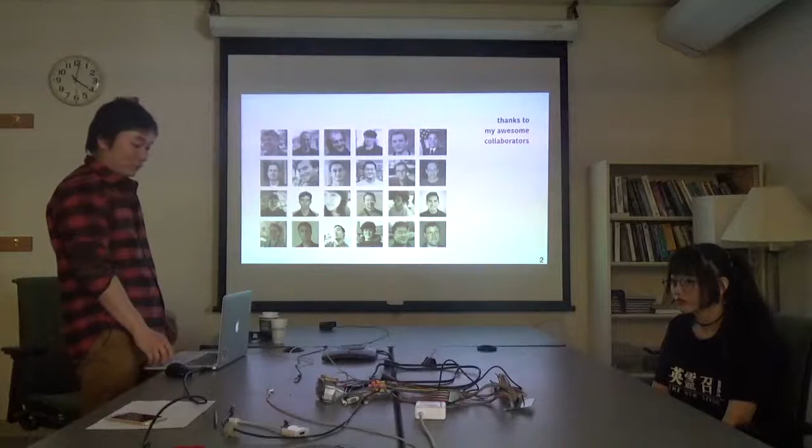So I'm trying to think about what I do, and I come up with this term called expressive computing as an umbrella term to encapsulate all my work. Basically, I build interactive systems that enable users to expressively convey intents and ideas in either digital or physical forms. All right, I'm gonna give you some examples. So here are my previous projects.

I built such expressive computing systems across a variety of different devices, from styluses to wearable and mobile devices to appliances and to the more recently emergent fabrication machines. So I'm gonna give you a very quick flashback of some of these projects. So I built this stylus that can splatter digital inks on the canvas to support artistic creation, and a very tiny keyboard on your watch to allow you to type for over 32 words per minute.

What if you can't type 32 words per minute even on an ordinary keyboard? You can learn and achieve that.

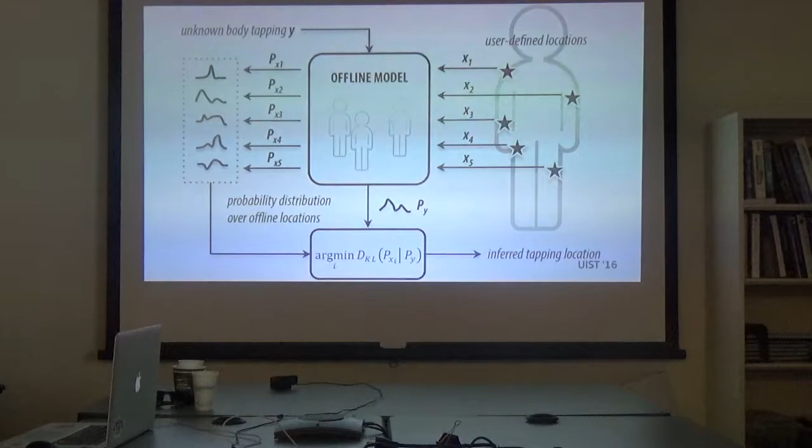Okay. So you just saw a smartwatch that can tell which part of the finger is touching the screen of your phone. Just by correlating the signals between two devices, you can add expressive interaction. And you can also detect which part of the user's body is being tapped by the phone. And by emitting a human inaudible sound, you can detect when the headphones are removed from the ear. So you can pause the music when they're removed and resume it when they're put back.

And to use an appliance like a printer, simply take a picture and it's connected to a phone, and the interface is provided for the users to directly use the appliance from the mobile device. So I hope we've seen a great space for interacting with these devices expressively using the systems I built.

However, I wasn't quite satisfied with all these previous devices on the left, and became more interested in fabrication machines, primarily because with fabrication machines like 3D printers, the eventual outcome is something physical, tangible, something we can actually have in our real life. So my thesis kind of focuses on this sub-area. So what about fabrication machines?

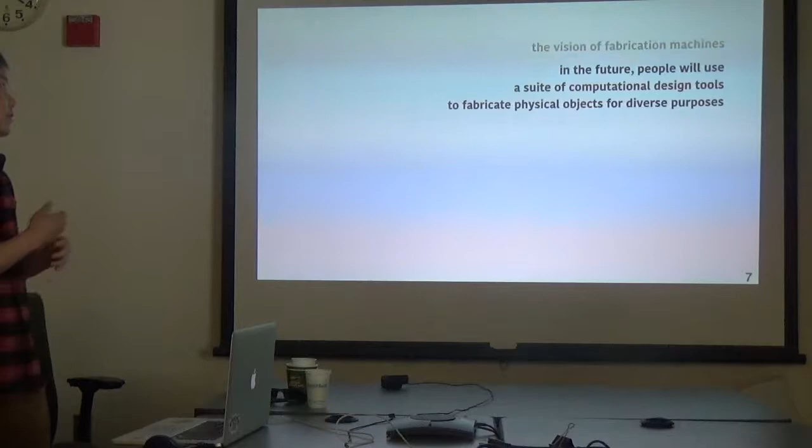I think the ultimate vision of it is that in the future, hopefully not so far, people will be able to use a suite of computational design tools to fabricate physical objects for diverse purposes. And my research in this sub-area focuses on computational design tools that enable people to do so. So what design tools enable people is allowing them to create objects. And in the sense of computer science, it is similar to programming libraries and toolkits that allow users to create applications.

So today I'm going to talk about an approach I developed to build such computational design tools called co-design of form and function. So I'll start by relating back to a more computer science perspective, talking about personal computing and going from there to connect to personal fabrication. I want to point out that the design tool is the bottleneck, and I'm working towards a co-design of forms and functions, which I'll explain a few slides later, and I'll talk about 4 different projects that instantiate this idea of co-design.

So relating back to more CS perspective, how many of you have seen this image before? The first personal computer, yeah. It's on the 1975 January cover of this Popular Electronics magazine. So it's this device that triggered the era of personal computing, where companies like Apple and Microsoft were born, whose products are still influencing our day-to-day life.

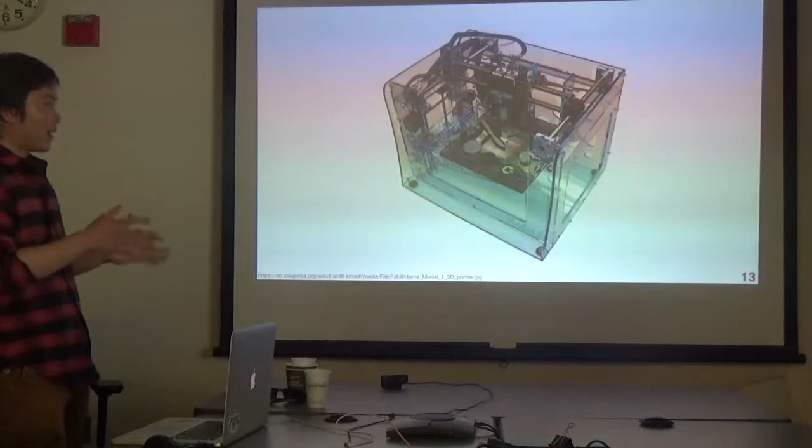So the reason I mention personal computing is that around the year 2005, the notion of personal computing actually triggered some innovation in personal fabrication. So this happened in Cornell University. Basically, a bunch of people from mechanical engineering are thinking, why can't we do the same thing like personal computing, but with manufacturing? So they invented this kit that allowed people to assemble their own fabrication machines, aka a 3D printer that can produce physical objects.

So to me, the greatest thing about fabrication is that it bridges virtual and physical world by allowing people to turn their design ideas into physical objects. And the market is seeing a kind of surge in the recent years. It's predicted that by the year 2020, we're going to almost double the market size of 3D printing as of this year.

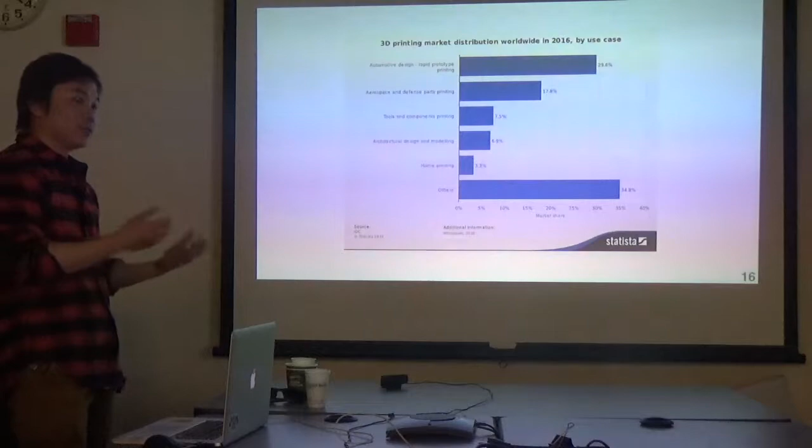And you can see that it's not just for hobbyists doing home projects, it's becoming more and more pervasive. Automotive design, aerospace and defense engineering, tools and components, architecture designs, all these areas are trying to adopt 3D printing as a new way of manufacturing things. So what this tells us is that we're looking at a very broad set of audiences, ranging from professionals to casual hobbyist makers. Many of these probably have no or little expertise of using the traditional design tools such as AutoCAD.

So where traditional design tools fall short is that they force users to go through a very tedious and complex process of manipulating low-level geometry. Essentially, if I want to make something, I have to start from very low-level primitives, manipulating triangles and faces, shapes, in order to achieve what I eventually want to design. So why is this a problem? Because it means as machines become more and more capable, design tools seem to have become the bottleneck of fabrication.

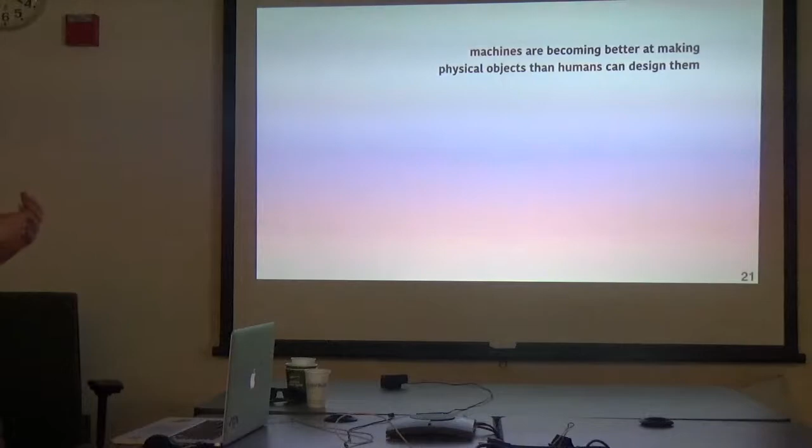So this is HP's Jet Fusion 3D printers, whose goal is to be able to customize the material property of a 3D object down to the voxel level, which is the 3D version of inkjet or laser printer, which can customize each pixel of a 2D image. So machines have become so capable that they are becoming much better at making things than humans can possibly design them. Which begs the research question: how can we build tools that can better support users' design tasks, going beyond the traditional way of doing design through manipulating low-level geometric forms, but instead supporting users to go higher level up, specifying the functions of their designs.

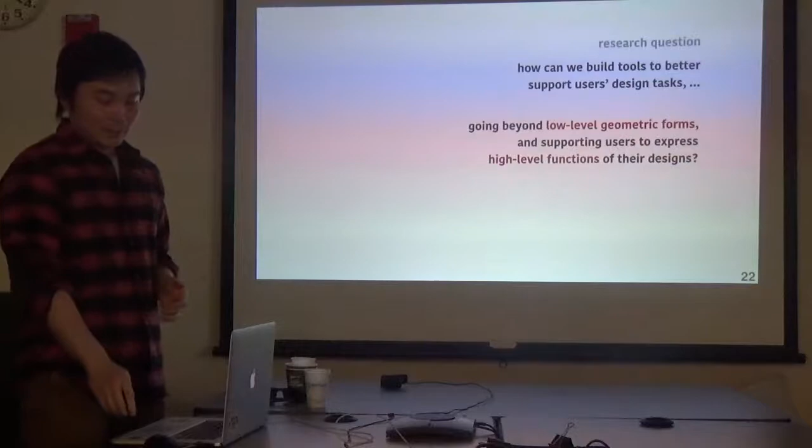So this research question inevitably touches this notion of form follows function. I don't know how many of you have heard this before, this term form follows function. It's a term from architecture, which means essentially the generalized notion is that everything's shape has certain functional meaning. If the function of a certain thing doesn't change, the form or the shape shouldn't change as well.

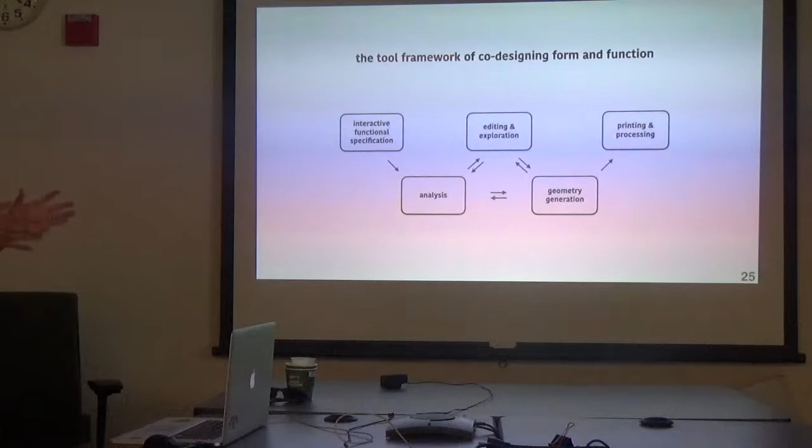So inspired by this notion, I'm taking a different approach towards making design tools. I take a co-design approach, which means that instead of designing function via geometric forms, I want to go towards a direction where we generate geometric forms, which is driven by functional specification, analysis, and user interaction. And in the following work, I'm going to focus primarily on geometric forms. So we're going to see a series of projects that instantiate this idea of a tool framework for co-designing form and functions. In my projects, I build a series of design tools that go through this high-level tool framework, which I'll explain later in each individual project.

So in the first project, Encore, the idea is to extend existing objects' functions with new forms. And the next project, Reprise, is about adapting these objects' functions. And then Facade retrofits existing forms for universally accessible functions. And finally, Forté optimizes users' created forms to meet certain function requirements. So let's look at the first project, Encore.

So we probably all accept that existing objects have some sort of permanently fixed functions, but personal fabrication machines like 3D printers actually allow users to extend these functions. For example, look at this teddy bear. By default, this is probably a bear that you can place on your table, on your bookshelf.

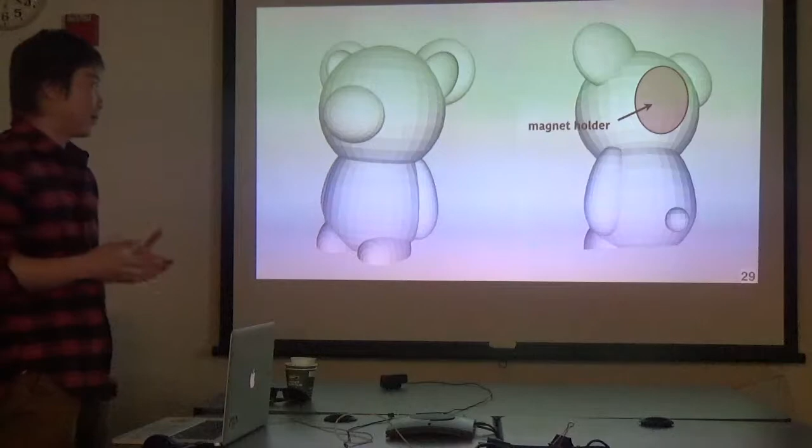But with 3D printing, we can potentially extend this bear by adding, for example, a magnet holder on the bear, so you can actually stick the bear on, for example, the fridge. So this somehow changes the functionality of this bear. And with scanning technology, we can easily capture existing objects' shape, which serves as input to process this object, and then add an extension to extend the object's functionality.

So this asks two basic questions. First, how to design and fabricate extensions to everyday objects, given the user-selected attachment point. And the second question is, if the users don't have a clear notion of where to extend a certain object, such as on the bear, how do we inform the users, given multiple possible attaching points?

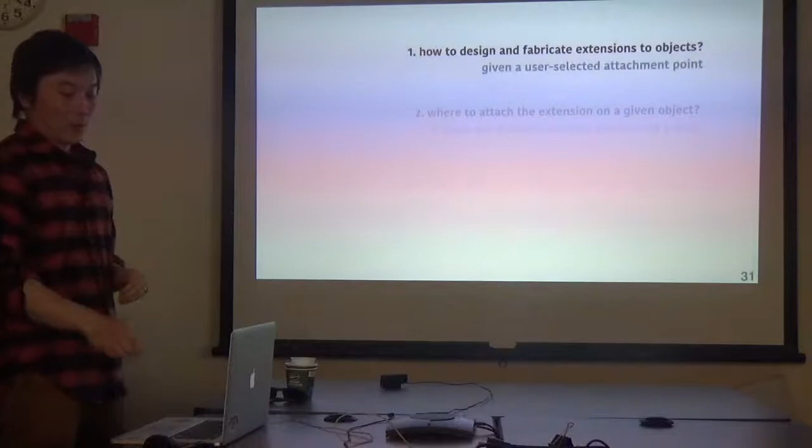So let's look at the first question. I'm going to show you a quick demo of how this works in the tool. So the input is the geometry of the teddy bear, and the user, in this case, selects the back of this teddy bear. And then the system computes and analyzes how to add a new component at that point, and generates the support structure as well as connecting structure that can enable a 3D printer to directly add a new piece onto this existing object, extending its functionality.

Is this done manually, or is there any source of intelligence behind that? Which part? The stick you printed on the back of the teddy bear. The only manual part is when the printer automatically pauses, the user will take the bear and then insert it, and then press a button, and then everything will resume. No, I know, but the notions of creating these sticks, where to put this handle, etc. Where? Yeah, the where. The user can select where to attach on the teddy bear, and everything else can be analyzed automatically. Okay.

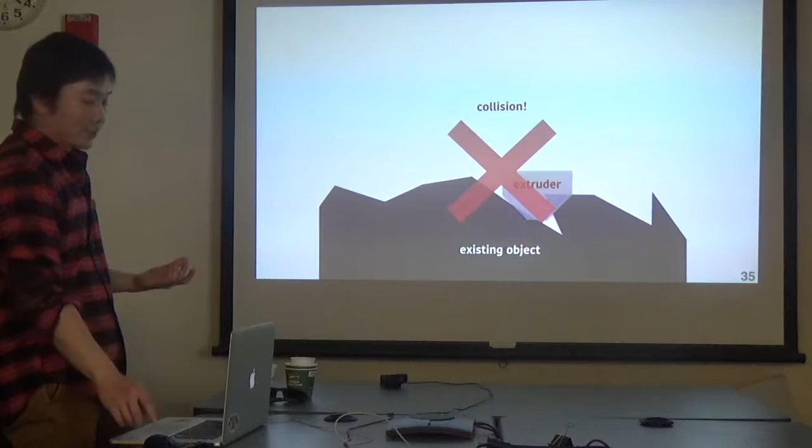Okay, so how is this different from the conventional 3D printing approach? Conventionally, we assume the object, extension or whatever, is printed on a flat surface. But in our case, this surface could be kind of arbitrary. So the first step in this tool is to generate a connecting structure called connector. First, we need to analyze the geometry of the attaching area, and then avoid collision, avoid driving the extruder of the printer into the surface, by simply raising it above the highest point around the area.

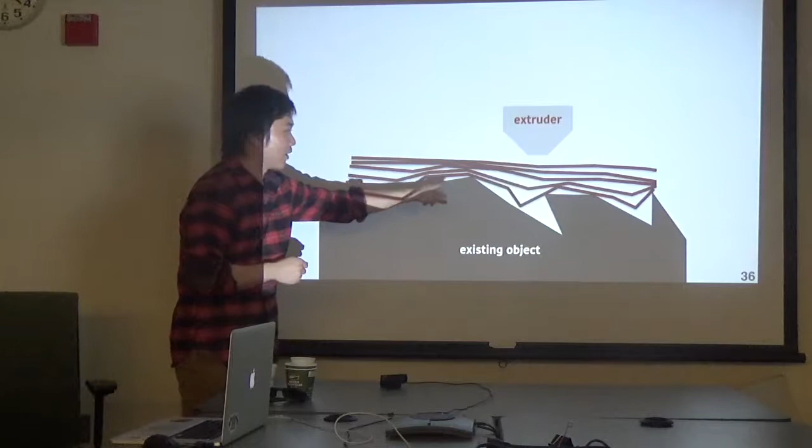And then the next step is to establish the connecting structure by doing what we call bridging. Essentially what it does is it tries to bridge this valley, and as it does bridging at each layer, eventually it can approximate a kind of flat connecting surface we want to establish. And we can compute how many such layers are required by analyzing the attachment area.

And one natural question, if you look at this process: how well does this really attach compared to the conventional approach? I'll get to that in a few slides. But first, we need to address a few edge cases. For example, if the highest point around the area is so much higher than the rest, that means there is a big drop when the extruder tries to make the connecting structure. So in this case, it exceeds the maximum drop, so the connecting structure is not going to attach well.

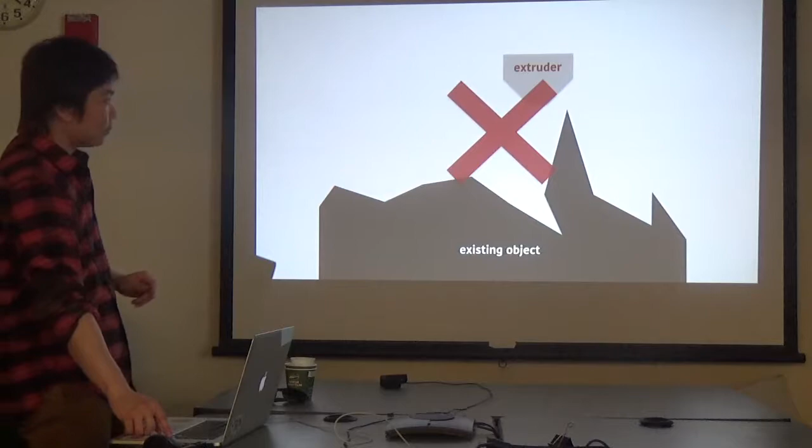Another edge case is, well, it's fine, you can raise the extruder, but somewhere above the area there might be some other structure. So we also need to detect that and prevent that from happening. Okay, so given all these analyses and considerations, we can now orient the teddy bear, compute the starting point of the attachment printing, and then also generate a support structure to hold the bear in place. And then the printing process starts.

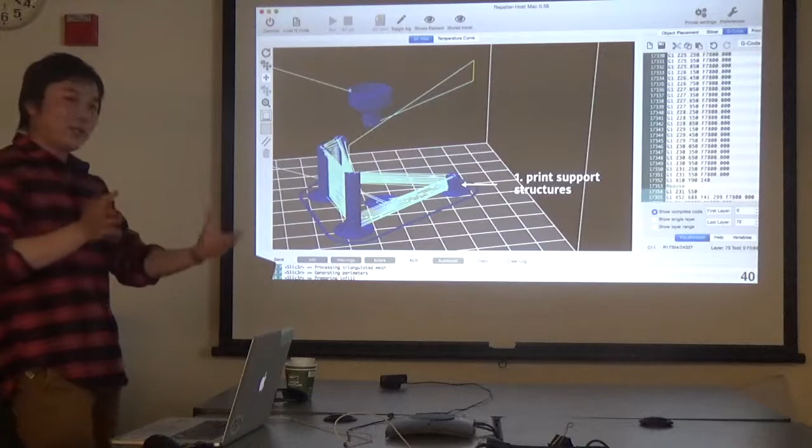So the first step is to print the support structure. As they are printed, the user inserts the bear into these structures, which naturally also brings the bear to the point of attachment, which means that without using any computer vision, we can automatically add a new piece of attachment precisely at the user's specified attachment point.

So to evaluate how this approach works, I conducted a physical experiment. Basically, I printed some attachments, and then I tried to pull these attachments, measuring the reading of the scale at the point of fracture.

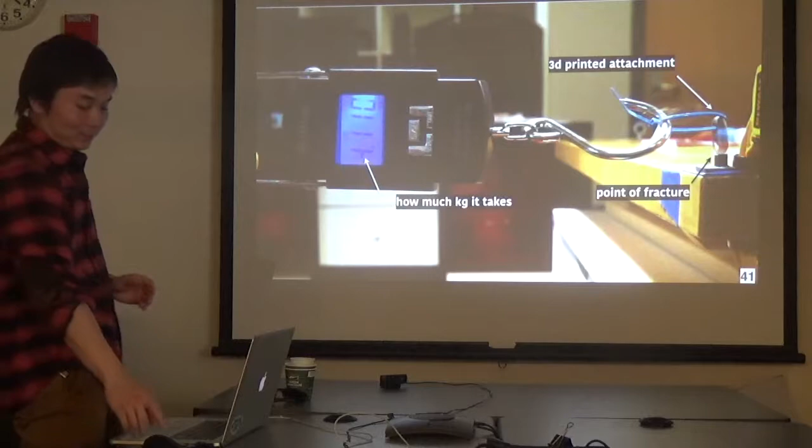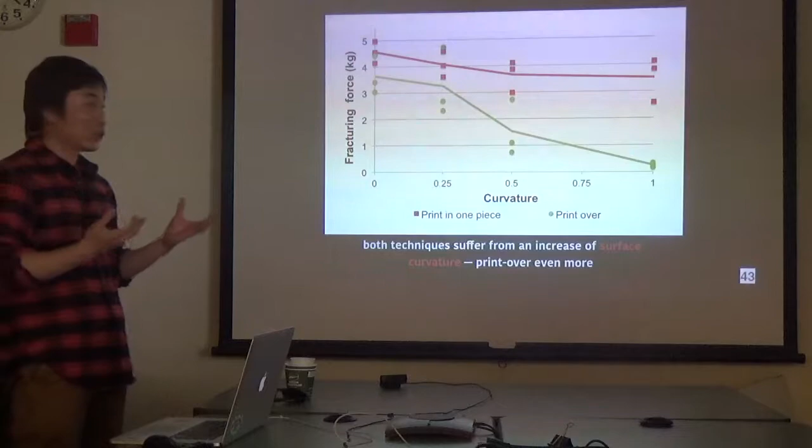So to summarize the study, the pro of this technique is there is no need to reprint object and attachment as a whole. Instead, we save time and material. But the con is it's not as strong, as shown in the experiment, as reprinting everything.

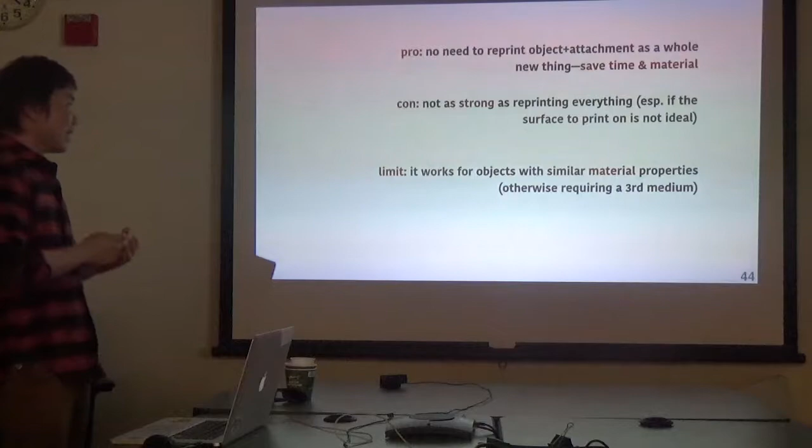Another limit is about material. So we assume that they have similar thermodynamic material between the objects and the attachments. If in cases like you want to attach something plastic to a piece of metallic object, then a simple approach to work around that is to add a thin layer of glue, which adds a universal medium to kind of pull two different objects together.

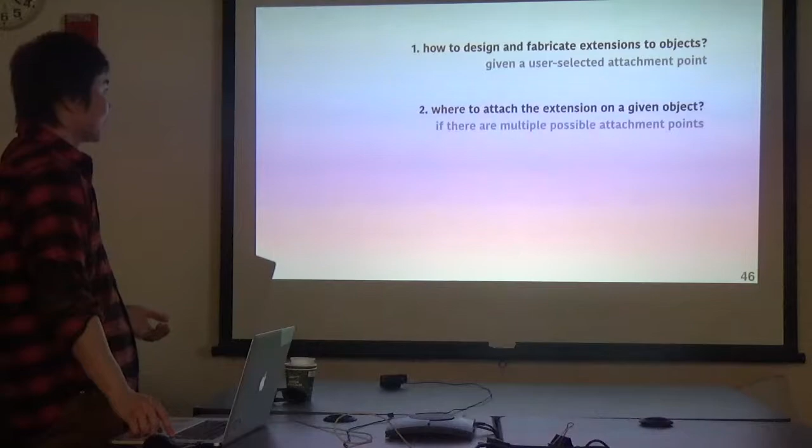So that answers the first question, how to design and fabricate extensions or attachments to objects. Then the second question is, how do we know where to attach if the user doesn't show a preference? So this is done by performing some analysis of the objects we call attachability. And we want to visualize this information to the users to inform their choice of attachment area.

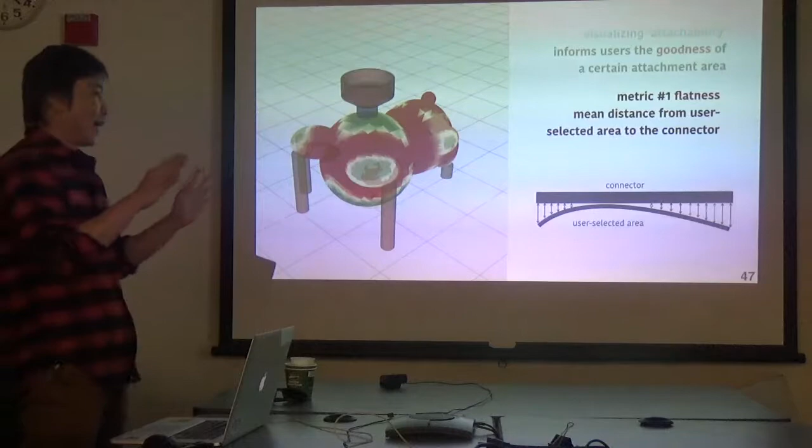So the first metric is flatness. So if the object surface is flat, then it's perfect. If it's not, we compute the average distance from the user selected area to the connecting structure, the connector.

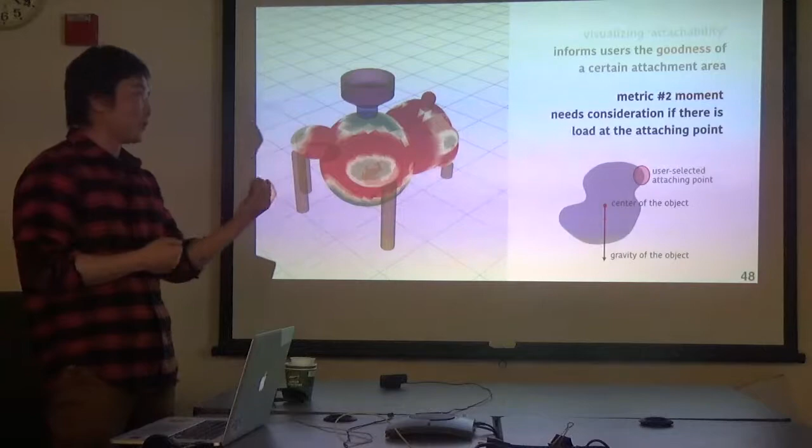Another metric is moment. So this needs to be considered if there is a load at the attachment point. So in the case of the teddy bear, assuming it's going to be stuck to the fridge, then the weight of the teddy bear will give the moment at the user selected attachment point. And we can compute that moment, and we can visualize all this information on the surface of the teddy bear to inform the goodness of attachment.

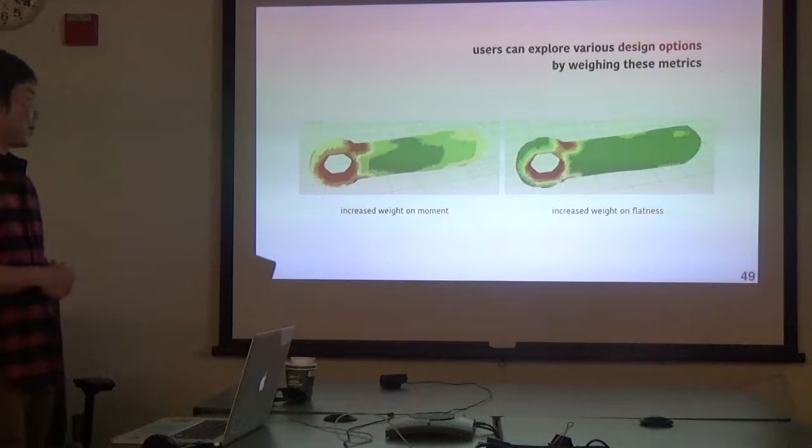We can also keep adding these kinds of metrics, and the user can explore these design options by giving them different weights. So a very useful example is if a user gives more weight to moment, then the good area will concentrate towards the center of mass. And if the user gives more weight to flatness, then you can see the green or good area will concentrate on the flat lateral area of this wrench.

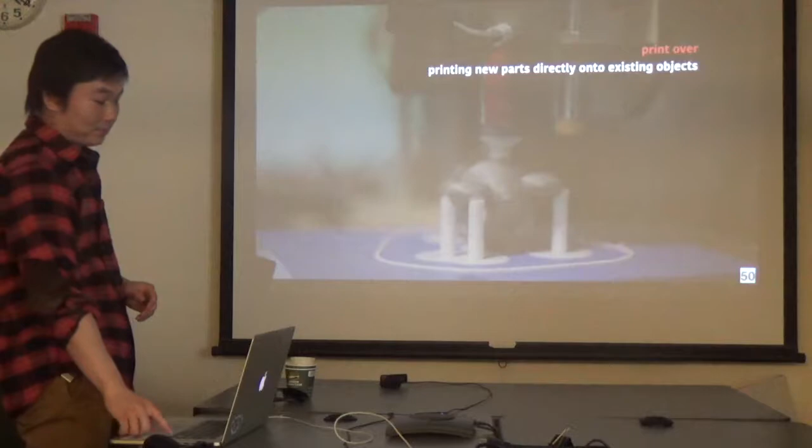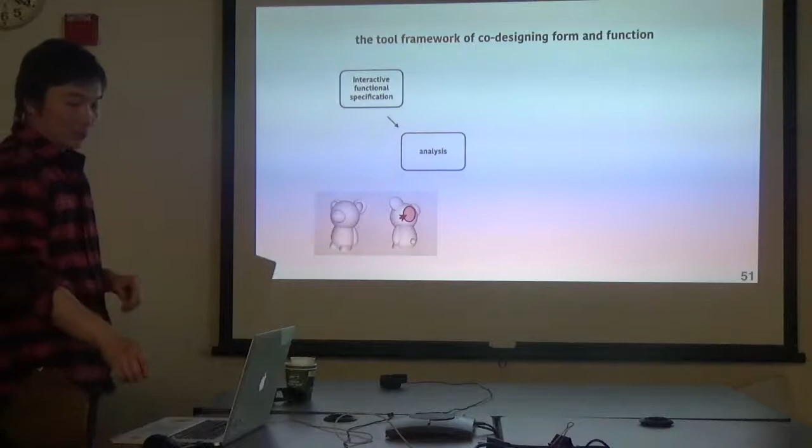So that's the print over technique, printing new parts directly onto existing objects. So returning to the framework I mentioned earlier, it starts with the user interactively specifying the functional specification, in which case the functional requirement is to be able to attach something to something else. And then it goes through analyzing the attachability of the object, allowing users to explore different attachment points, and also generating the support structure, the connector, and finally generating the printing and processing instructions, automatically pausing the printer, allowing people to insert the teddy bear and then resume it.

So under this tool, we can also explore different techniques such as printing through existing objects. So how does that work? Imagine you're printing a label for this pair of scissors. You can actually pause the print and in the middle insert the scissors. So you can print this label through the handle of the scissors. And when it's done, it's naturally interlocked with the object without using any adhesives or fasteners.

So here I want to emphasize the importance of providing analysis interactively with user editing and exploration. So the basic approach of this idea is we want to print something through something else, such as printing this square while letting it go through the ring. So the user would start by interactively positioning these two objects together, so that's the functional specification.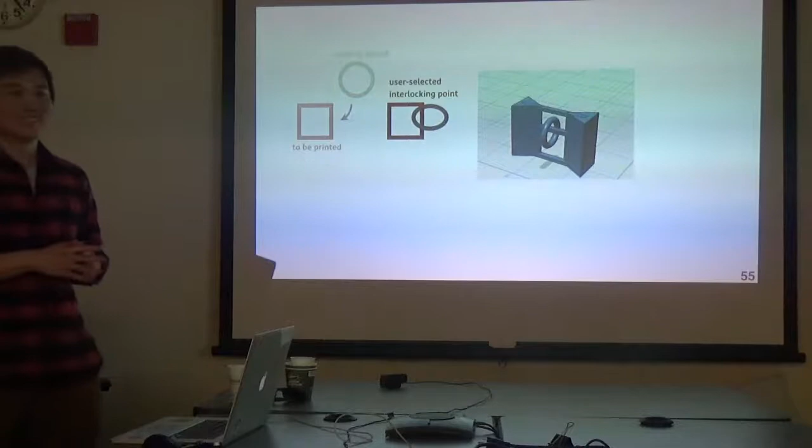But in some cases, it's not obvious whether a given configuration would actually work. So here's a quiz. Given this configuration, and we're printing this larger structure this way, at which point do you think I should pause in order to put the ring through the partially printed structure? Do you even think that's possible? Can you rotate it? Right, you need to rotate it. But at first sight, it's probably not so obvious. So as an end user, you probably don't get that instantly.

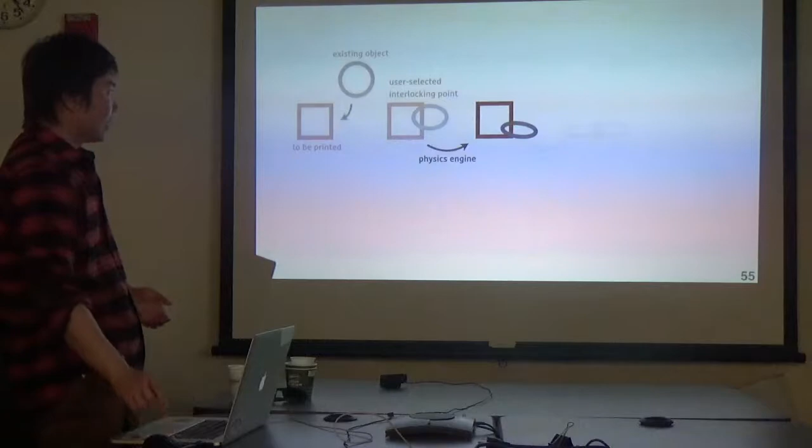So that's why we need certain analysis and simulation to inform the user whether a certain configuration is actually feasible. So first, the tool turns on the physics engine, and the ring drops under gravity. So this simulates the final position of the ring should it be able to be inserted. And then as the square is partially printed, this is what it looks like. Then the question is, is this actually feasible?

So this is Project Encore. It extends existing objects' functions with added new forms. The next project, Reprise, kind of explores the design of such extensions or attachments. In particular, the goal is to adapt existing objects' functions with these new forms.

So we have a very specific design goal of adaptation, which means that we want to add components that can mechanically modify or enhance certain functions of objects, such as this green structure that can help you fasten or stabilize the drill bit as you try to sharpen it.

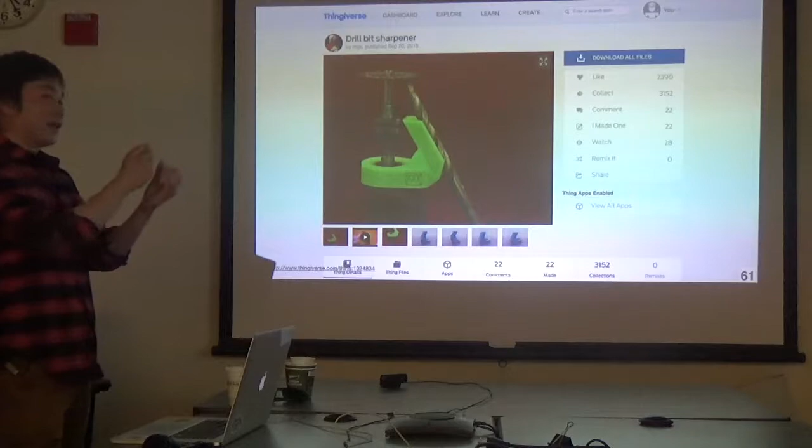And the more generalized reason for needing adaptation is that most common objects sometimes might not work for certain uses or use cases, such as young kids might not be able to reach the faucet. So it's important to add this faucet extension in order for them to use them.

So these are kind of great adaptation designs, but it's not clear how an end user can actually go about designing them. So in order to understand the design space, I surveyed over 3,000 examples through books and online communities. And the goal is to understand the main strategies of designing these adaptations. So I summarized the 5 major strategies.

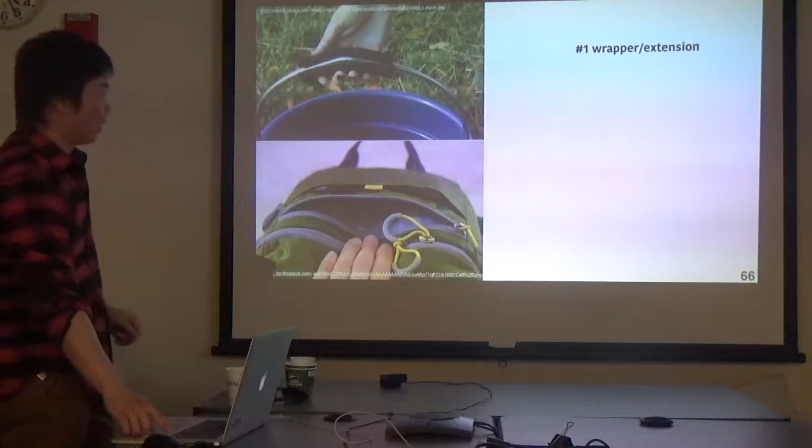So the first one is wrapper extensions, such as the wrapper around the handle of a bucket, or the ones that extend the zipper pull on your backpack. The second class is handle, such as the one that helps you hold a knife. The third class is lever, such as this one that helps you turn the knob. The fourth class is anchor and stand, such as the one that fixes this nail cutter on the table.

And finally, we have guide. So this is kind of an interesting discovery. Some people actually cut out this cardboard to make it easier to locate and press these buttons.

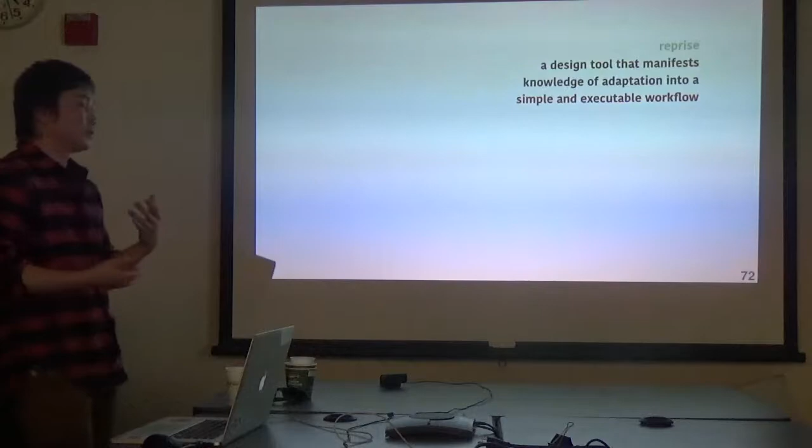So with this design space as the foundation, I developed this tool called Reprise. It manifests the knowledge of adaptation into a simple and executable workflow. So I'm going to show you a demo demonstrating how this tool works. So imagine Larry, an occupational therapist, helping a patient adapt a pair of wire cutters, as the patient recently suffered a hand injury. So Larry goes to Reprise.

The first step is to interactively specify the action of this object, this wire cutter. And the virtual hand will help Larry specify the orientation of grasping one of these handles. And then Larry selects the type of strategy, in this case, the wrapper that can help the user grasp the handle.

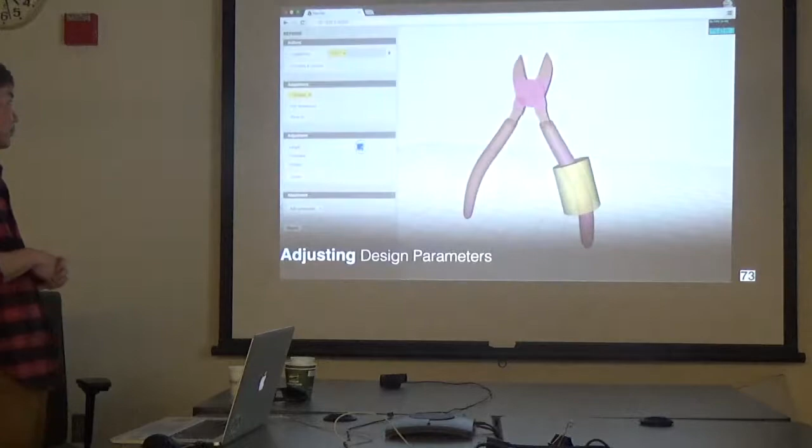He can also adjust the design parameters, making the wrapper longer or thicker, or adding small bumps on the surface to tighten the grip. And then he exports everything into a 3D model and prints the wrappers using soft material.

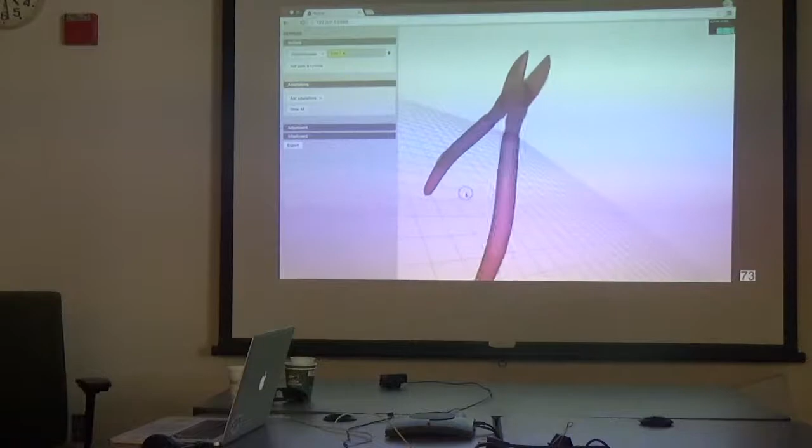So this eases the user's grip on the handle, but it doesn't solve the problem of clutching them. So Larry goes back to the tool and selects a different type of action, clutching. And by simply clicking on the 2 handles and then at the pivot, he specifies the 2 clutching arms. Then he generates this lever structure that can decrease the force required for clutching the cutter.

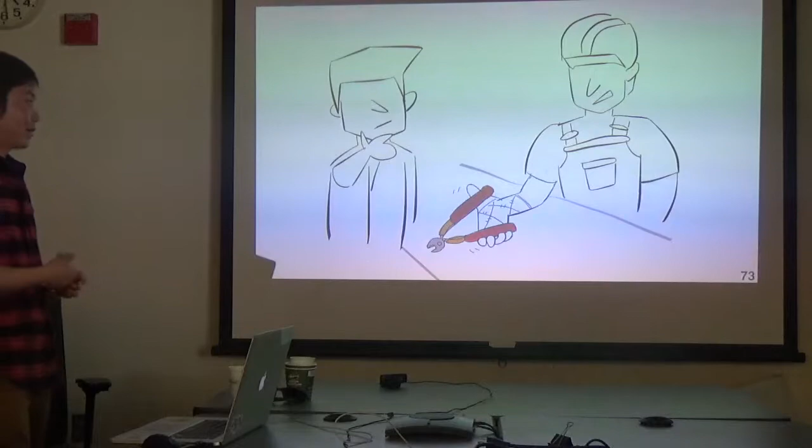So it reduces the force, but it makes the cutter overall too large. So Larry has to go back to the tool again and iterate on the design. So he removes one of these levers, and instead he tries to add a structure that can anchor the whole thing on the physical surface. He also adds some attachment structure to help attach this anchoring structure to the handle.

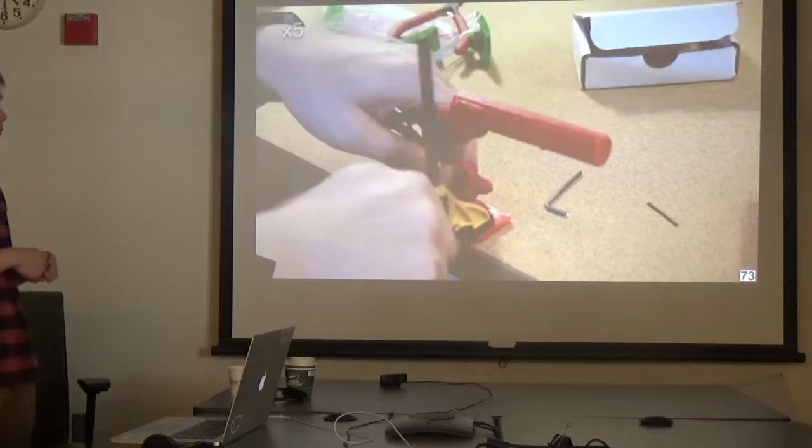So it turns out this is the best design the user likes, which enables him to use the cutter using just one hand.

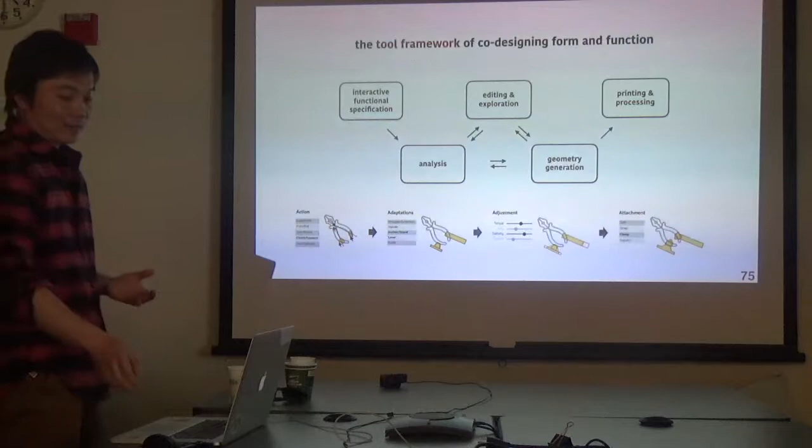So this demo kind of illustrates how Reprise's workflow enables people to design adaptations. And again, you follow this framework, starting with specifying the type of action the user is dealing with, analyzing the geometry of the object, and providing adaptation strategies, generating accordingly the geometry of adaptations, where the user can then edit and explore different design parameters, and finally adding the attaching connecting structures and printing and processing to finally produce the adaptations.

So to validate this tool, I replicated all these 15 of the previously found examples, each of which representing a dot in the lookup table. So you can see how you can design these levers to help squeezing a spray bottle, something to help you open the closet door, or opening this jar, or a handle to secure the grip of the Sharpie. Or this guy that makes it easier to put the Sharpie back to the cap.

And you can actually kind of combine different adaptation strategies together. So this entire thing has a guide, a handle, and an anchor. In some cases, you can adapt certain things differently. So this ring helps you turn the key, and this guiding structure helps the user put the key back into the lock. So that's Reprise. It adapts existing objects' functions with new forms.

So from this project, we also learned that even the most common everyday objects sometimes might not be physically accessible to certain people. And if we keep looking, we can find probably more such accessibility problems. So what do you think are the problems with these microwave oven buttons? Do you see any problems? Any reason why certain people cannot use these buttons? Complicated. No. Yeah, there's one issue. Yeah. Besides that, something that's more fundamental. No haptic. Yeah, precisely. They are flat, providing no tactile or haptic feedback for visually impaired people.

So we kind of look at how 3D printing or fabrication can help solve this problem. So looking into a different project that retrofits existing forms such as flat buttons for universally accessible functions, such as pressing them or knowing what these buttons actually are. So this video shows the entire process of making these buttons usable or accessible. User starts with taking a picture. So this is a blind user, by the way. There's an audio guidance from the phone to help the user take a picture. And the dollar bill serves as a spatial or measuring reference.

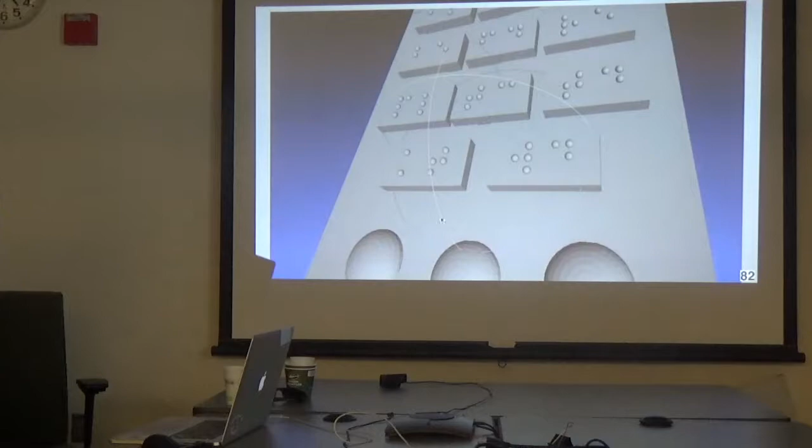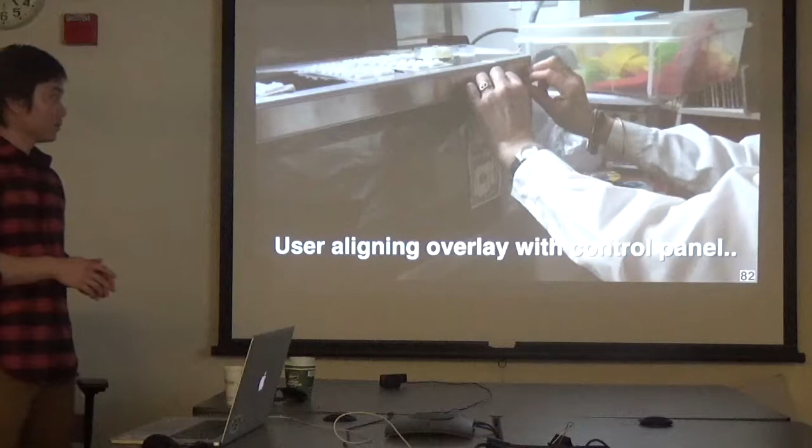Can I ask a question? Yes. So who actually put that dollar bill on the microwave? In our experiment, we put the dollar bill, but in reality, the user can also put the dollar bill on the surface of the appliance, close enough to the control panel. Right, but the user is visually impaired. How actually can a visually impaired person precisely put that dollar bill into the right position? I don't think it requires the precise position. Oh, okay. As long as it's present in the image, we can run analysis. We can obtain the dimension of the dollar bill and compare it to the buttons. I see. So it doesn't have to be at a precise position or orientation. Okay.

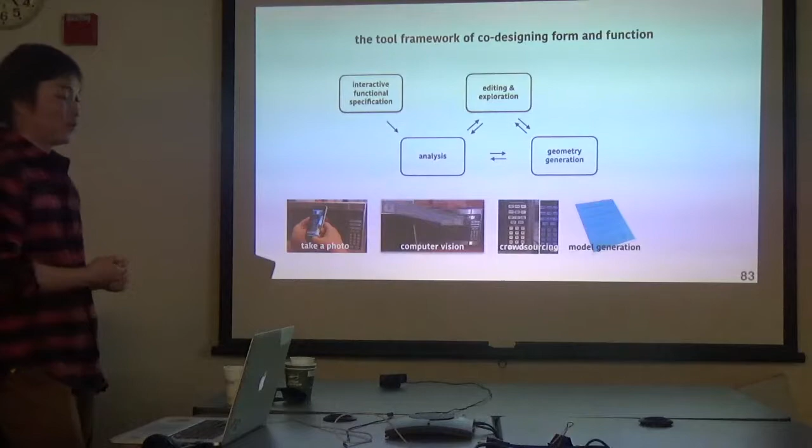So in this process, the user starts by taking a picture of the microwave oven, telling the system that I want these buttons to be usable. And then we use computer vision techniques to match the dimension from the dollar bill and identify the area of interest. Basically, it crops the control panel and then sends it to the crowd using crowdsourcing to label the positions and text on these buttons, which then allows the user to explore the information on the phone interactively and identify what they want to add as tactile feedback. And finally, generate a 3D model and bring the tactile layers to be added to the appliance. So in our study, 11 blind participants were able to independently create, affix, and use tactile overlays onto appliance interfaces.

So that's Project Facade. We retrofit existing forms for universally accessible functions. So looking at the previous 3 projects, something that they have in common is they are all incremental extensions added to existing things to augment functionality.

However, there is a larger set of objects such as furniture, which is standalone and nonetheless able to support and interact with other objects in the world. And more importantly, users might find it difficult to design such objects because some functional requirements require more expertise.

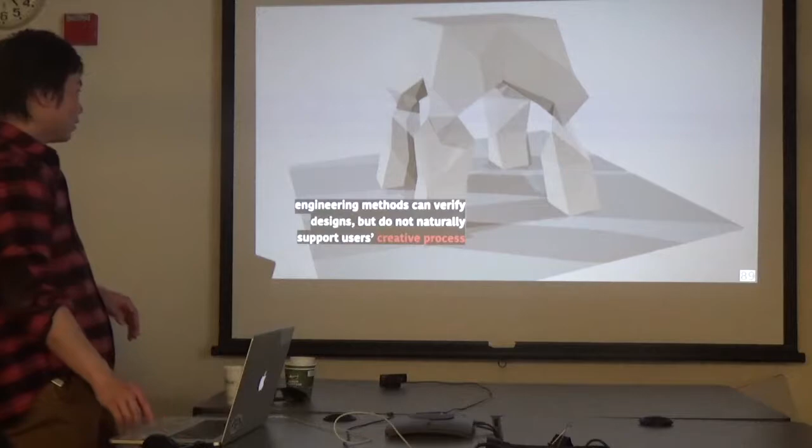On the other hand, engineering methods can verify whether a certain piece of design actually works, but they do not naturally support users' creative process. So I then look into this problem of combining the user's creative forms to meet functional requirements that are usually achieved by running some engineering methods such as optimization and simulation.

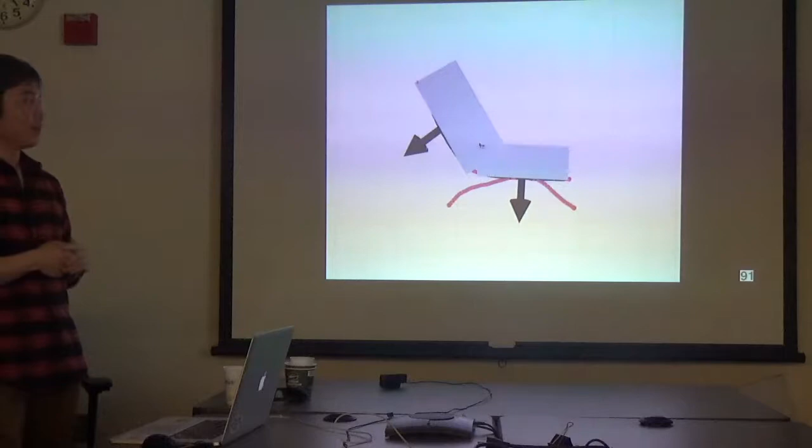So this is an earlier prototype of this ongoing work. It shows that the user is drawing a skeleton of a chair, and then the user also annotates these functional requirements, saying there's force on the back of the chair, and I want this empty space for a person to lean on it, as well as force on the bottom of the chair and some empty space for someone to sit on it. And finally, this chair is positioned on the ground.

So with this information, after the user draws the design and annotates the functional requirements, we can then run a finite element analysis, which analyzes how this design, this basic material, will deform under the load specified by the users. And then we can use an optimization process to generate a structure whose high-level goal is to resemble the user's original design, but with built-in structure that also satisfies the functional requirements.

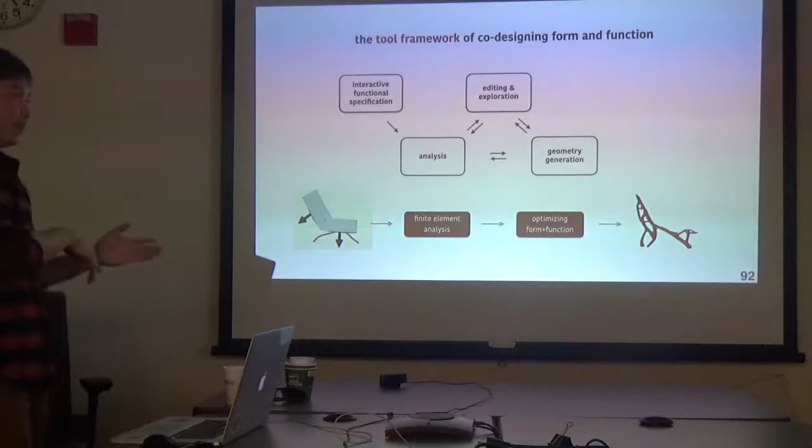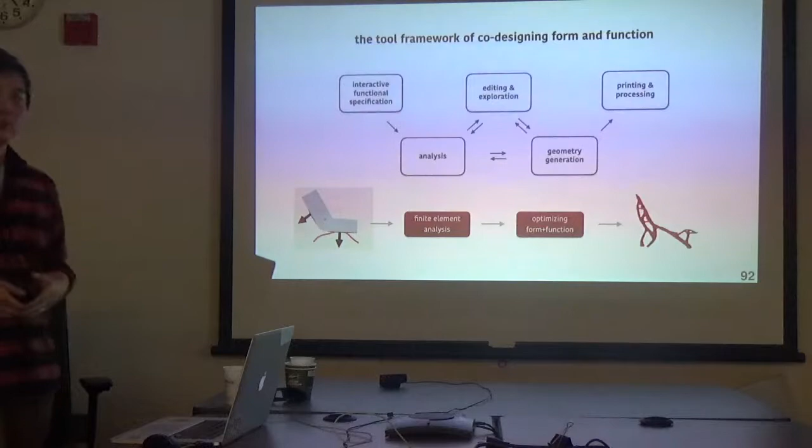And the users can go back and then maybe change their sketch or add new features or remove some suggested structures. And through this process, eventually you want to be able to combine users' designed form as well as the functional requirements that need to be met for this particular object, a chair. And finally, the end goal is to be able to create such objects such as furniture.

So I want to talk a little bit more about optimizing form and function together. The original method is from a paper around 1999 using a compliance minimization approach. The basic idea is starting with a block of material and a bunch of other parameters such as the amount of material to use, the properties of material, the loading forces, the boundary condition. I want to selectively look at these pixels, adding or subtracting weights. So eventually you can imagine carving this material and then what is left is a structure that meets all these requirements.

So we can look at the detail of this approach, which basically at each pixel or each element tries to minimize the compliance or deformation of each single element by changing the weight. So conceptually, we can add to this optimization term something that represents how far away a certain structure is deviating from the user's original design. So basically, we're adding a distance field. So for each element, we know whether this element is on the user's design or it's very far away from it.

Another way to look at this is we can consider compliance or deformation as function, which is what we want to achieve or satisfy, given the load on the chair. And we want to add a term describing the form, which means that we also want to keep the user's original design. So by adding these two together, the eventual goal is to create objects co-designed with the user's provided forms and functional requirements.

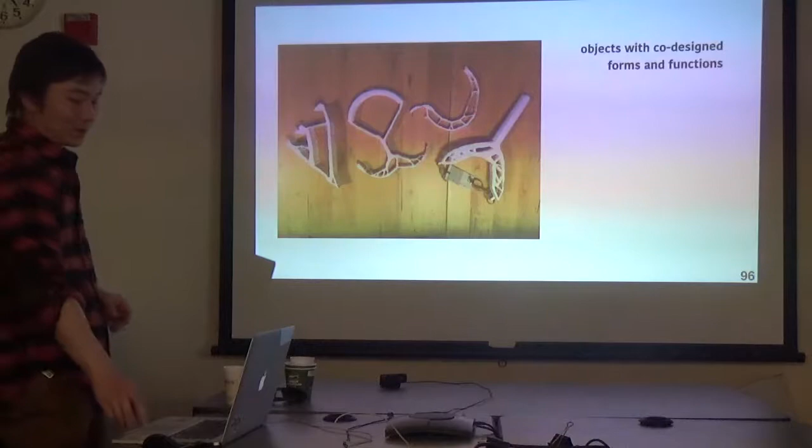So in doing fabrication research, I believe in this notion of deploy or die. So I'm actually using these two brackets. In my previous talk, I said no accident so far, but unfortunately, a few days ago, they broke. I was trying to remove the monitor and I broke them. But it's nice to see how the things designed by your research actually work in reality.

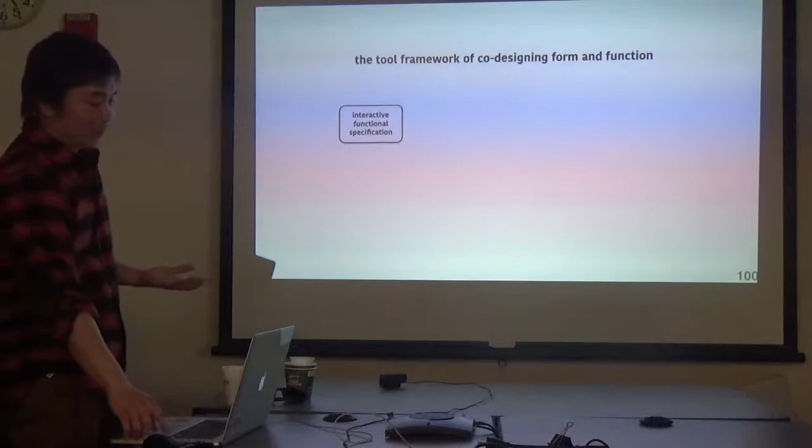So I've told you about 4 different projects. You can see each of them has something related to forms and functions. And to recap, we are looking back again at this framework. I figured that with all these tools, we can always start with users' interactive specification of functions, iterating between analysis and users' editing and exploration, and the generation of geometry. And through this process, we can eventually produce printing and processing instructions.

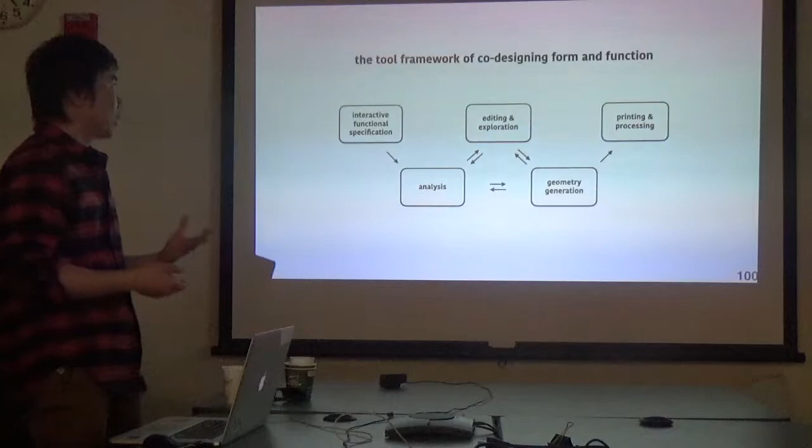And this is what I imagine as a high-level and generalizable framework through which you can achieve co-design of form and function in computational design tools.

And some unanswered questions so far for future. So I want to consider more interaction methods or techniques in this framework. So at present, we can understand people are looking at a flat screen and then everything is projected from 3D to 2D, which is very unintuitive and difficult to grasp in direct manipulation method.

So in the future, I imagine that we'll have effectively more emerging or immersive environment that can merge design and fabrication together as an integrated space, such as using augmented reality devices such as the Microsoft HoloLens. So imagine that in the future, users put on the AR device and they can look at a chair, say, I really like the shape of this chair, and I can just obtain the geometry, taking it as my starting point. I want to work on this geometry inspired by existing objects.

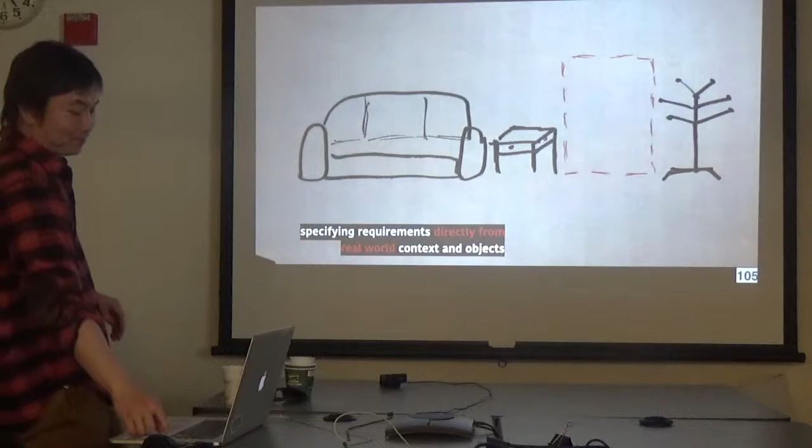And as I work on my design, I want to put it back into the physical environment to see if the chair I design actually fits with other furniture in my living room. And as I finally am done with this design, I want to actually manufacture it. So by projecting this virtual information into the physical space, I can experiment with different material and assemble them together to actually make the physical design.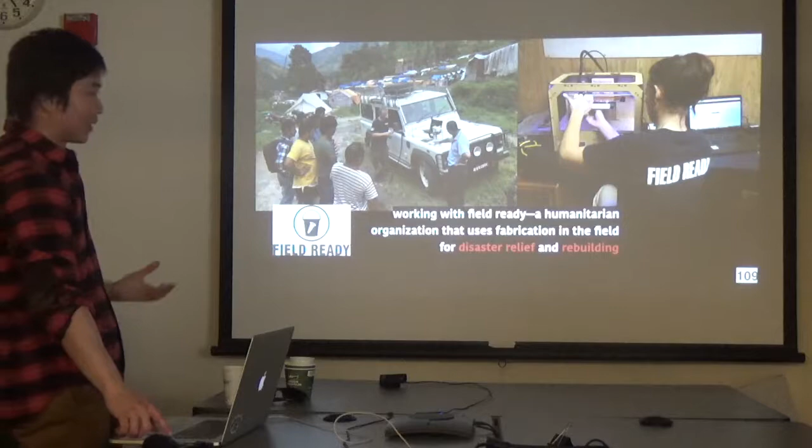Another scenario is relating to developing countries and disaster relief. So 3D printing can be potentially very useful in this scenario because of the limited resources and the emergency of using life essential things. And one very interesting research question is how do we actually reinforce and fix these everyday things so they can stand strong in the face of disasters. And this requires much more domain knowledge than mechanical engineering. There are also other economical or environmental considerations that need to be considered.

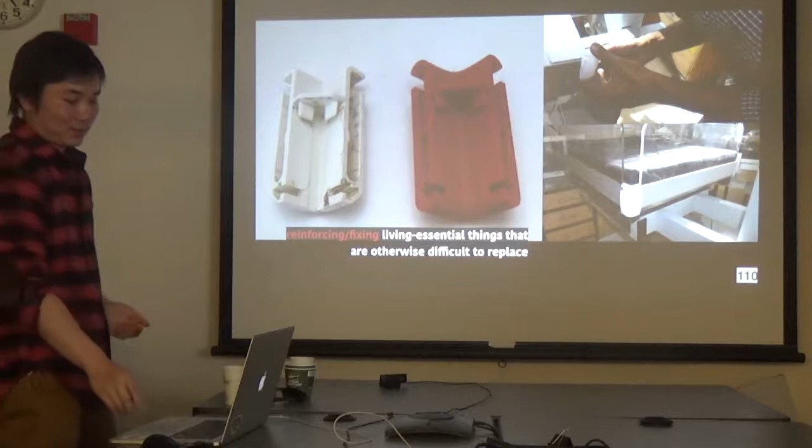Also, as I showed earlier, in the future, 3D printers will be able to design and fabricate material at the resolution of each voxel. So how do we provide design tools that consider the material science perspectives, educating users what material to use and how to use such material at the right place of the design. So I think all these domain knowledge is very important to be incorporated into future design tools.

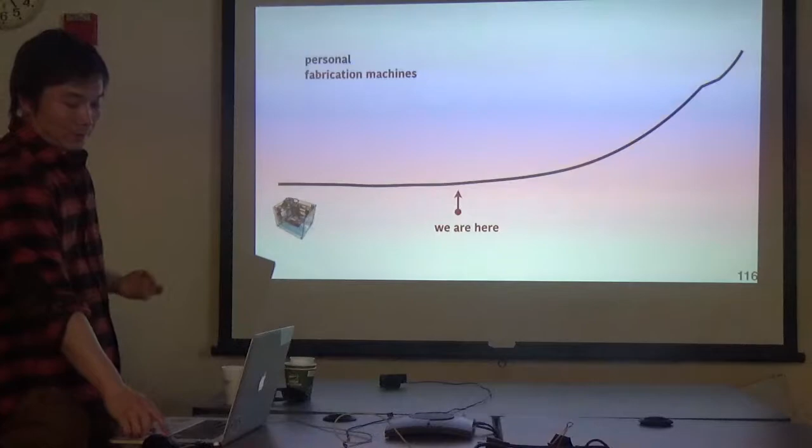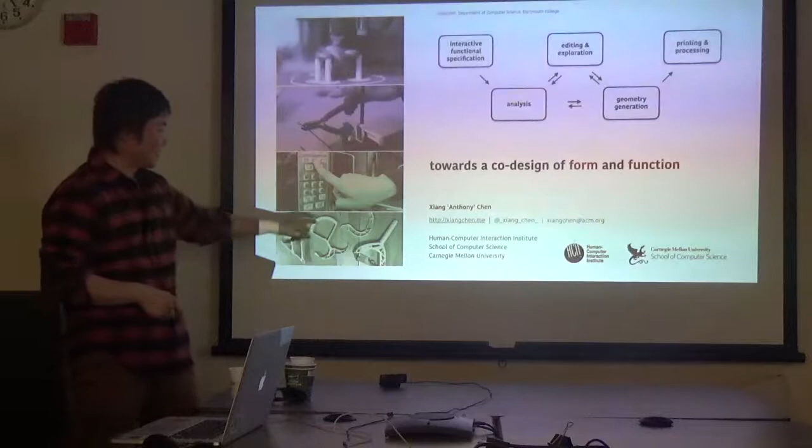The bottom picture, you know it's a bracket on the left, it looks like a slingshot on the right, but what about the other two guys? Yeah, this is a mustache shopping bag handle I designed. So you can throw a shopping bag, so you can carry two. Okay, cool. And this is a hook. Okay, just to hang a coat or something.

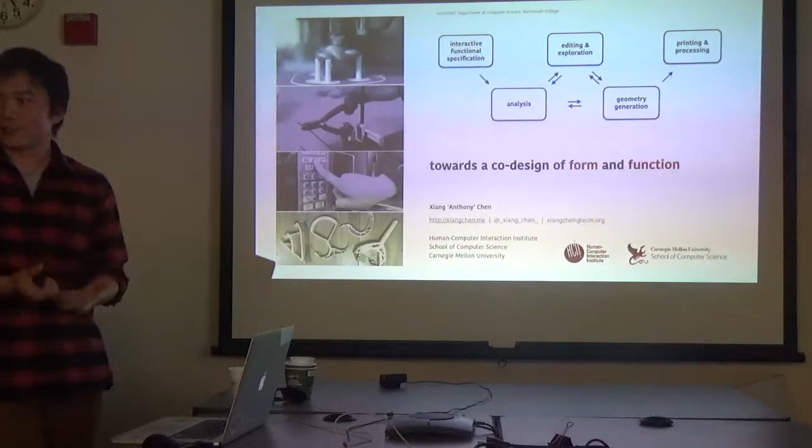I don't know if a user would have access to both of the tools, but how would a user know if they wanted to use Encore versus Reprise? Because it seems like they're somewhat similar, but have very different results. Yeah, Encore focuses on just attaching A to B. Okay. And Reprise is more specific, focusing on adapting the everyday object. So if you want to make certain action with an object easier, or make it more effortless, you can use Reprise. So Encore, in some way, is more general. Okay.

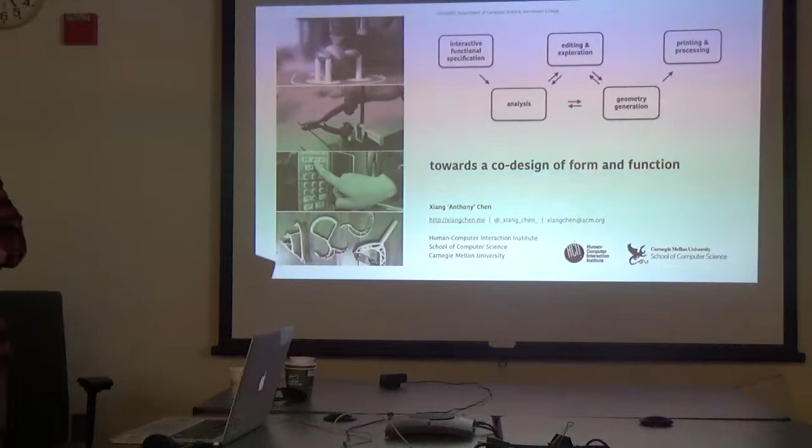So what do you think about the future of personal computing? Are we going to stick with 3D printers, or do you expect new technology is going to come to help us to fabricate? Yeah, I believe personal computing is becoming more and more physical. And fabrication is just one instance of becoming more physical.

Another example is Uber. The outcome of Uber is not an algorithm or some results from data science or machine learning. The outcome of Uber is a car driving itself. So it's very physical. There's a lot more to consider than just pure artificial intelligence or algorithms.

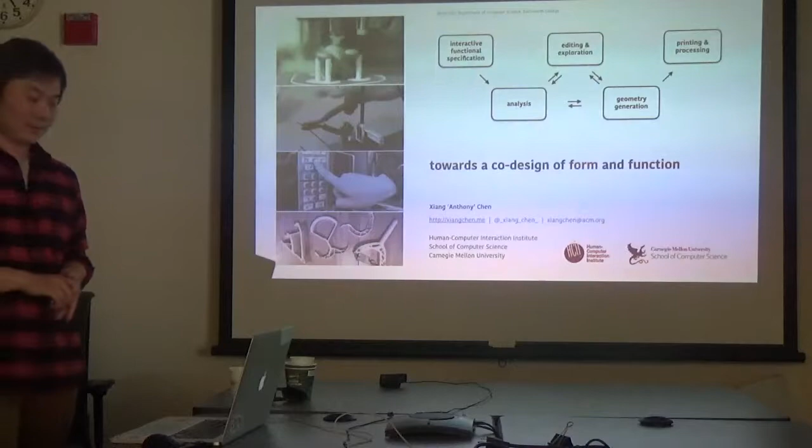So I'm quite interested in the furniture design project. Google has a product where you can draw a sketch and it will create a sleek icon or something. Do you think it's a good way to integrate your design techniques and their product to make the user interface easier? Yeah, I think it's possible, although I'm not very familiar with Google's project. You can just draw a rough shape of a chair and it will generate a perfect icon shape of a chair. I see.

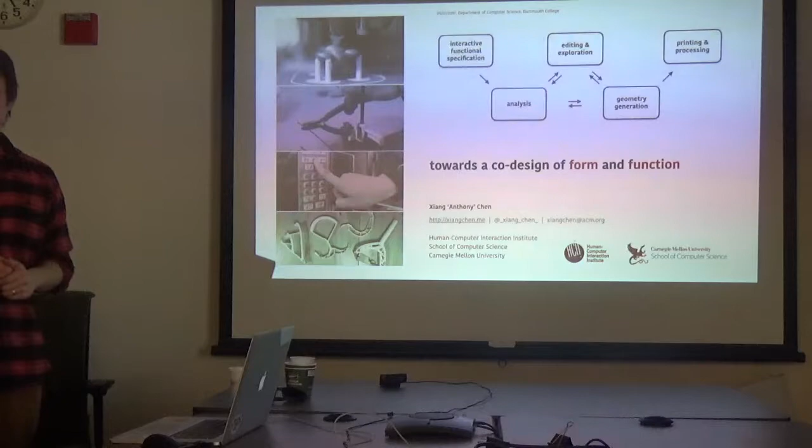I think there's some sort of intelligence or data-driven approach in that it takes the user's input as a query, maybe retrieves some templates, and then fits the two together, which in essence is similar to Forté, which also transforms users' input into a design that is in some ways better. For example, structurally strong.

So I have this question. We talk about crowdsourcing. We talk about personal fabrication. So which way is the future? Crowdsourcing. I'm thinking I don't need to fabricate myself, right? I just ask people to do it for me and they can send it over to me. If it's really crowdsourcing, I can imagine somebody in the Hanover area working together on a project and getting it delivered to me pretty quickly. Versus I have to fabricate by myself. Which is going to be the future?

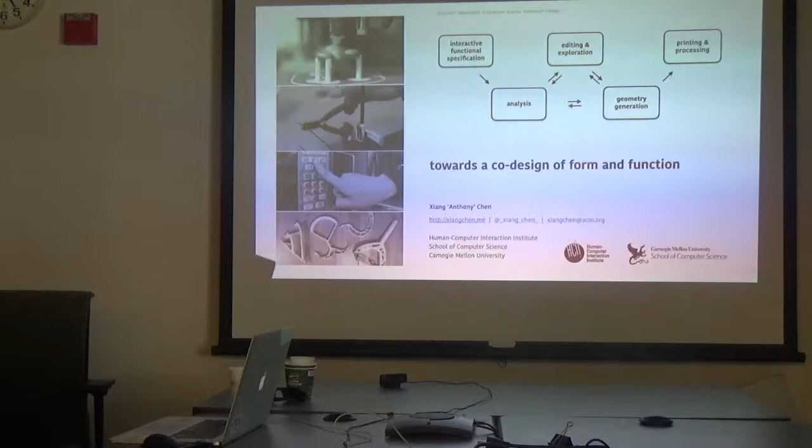I think maybe the combination of the two. You can't really get the crowd or any other methods to replace your ideation process. You still want to have the originality of your ideas and express it in some ways. And then the ways to actually realize your ideas can be either crowdsourced, more traditionally manufactured, or using 3D printers.

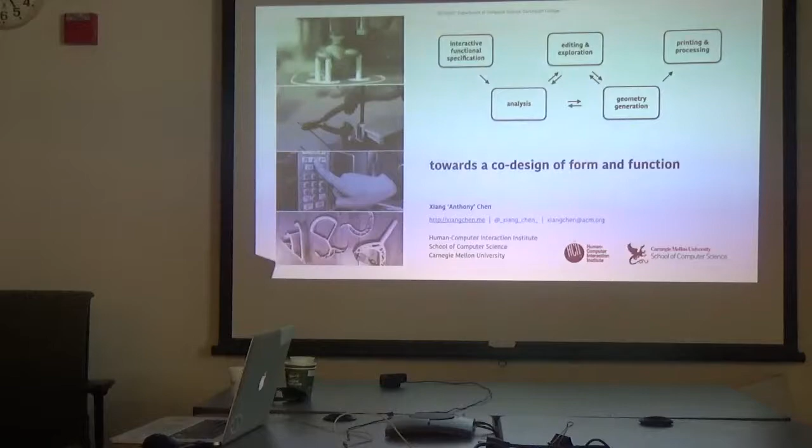So why do computer scientists care? How can we as computer scientists actually help? That's a good question. Relating to one of the earlier slides, similar to how we've been developing toolkits and libraries that enable people to write applications, we're doing something very similar. We are providing design tools that can enable people to realize their physical ideas. So there's a lot to be learned from the CS approach of working on toolkits and libraries and how that can be applied to design tools.